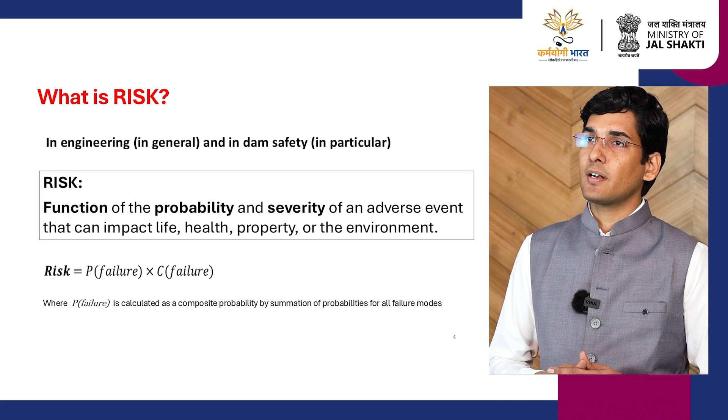Now, what is risk? When we talk about risk in dams, we are looking at two things together: the probability of an event happening and the severity of its consequence. In simple terms, risk is about how likely something is to go wrong and how bad it could be for life, health, property, or the environment. In mathematical terms, risk is represented by multiplication of probability of failure and the consequence of failure.

Now, calculating the probability of failure: the exact probability of failure isn't easy to calculate. It's complex, costly, and takes a lot of time, expertise and data. That's why the tool uses fragility factors instead. These act as a practical substitute for probabilities, making the process faster and scalable for thousands of dams.

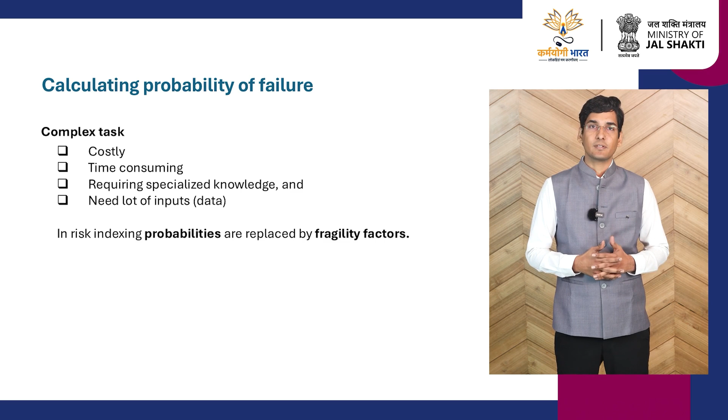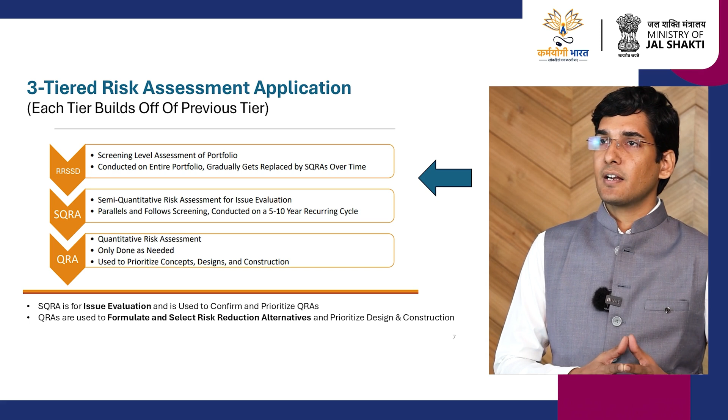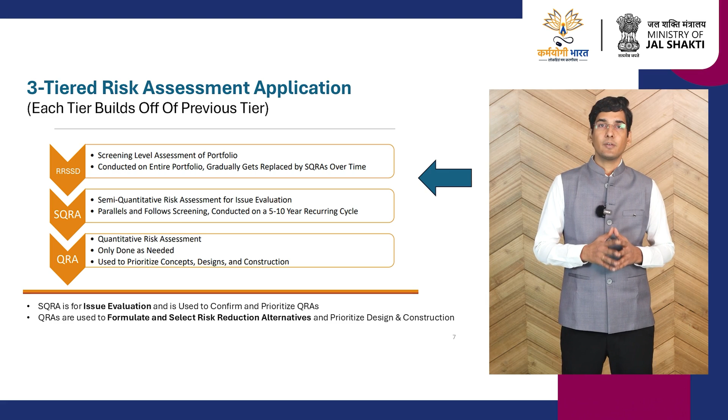Now moving to the 3-tier framework, the assessment system works in 3 stages. Tier 1 is rapid screening, which is a fast process. Tier 2 is semi-quantitative risk analysis. Tier 3 is detailed quantitative risk assessment. In the initial 2 stages, we prioritize dams that require deeper consideration at the next level.

Why screening first? So, why start with screening? The answer is simple. Resources are limited. Financial, human, and technical resources can't cover detailed studies for more than 6,000 dams all at once. Screening allows us to prioritize so that the dams needing urgent attention are identified and addressed first.

And as per the Dam Safety Act 2021, this whole 3-tier process, rapid risk screening (RRSSD), semi-quantitative risk analysis (SQRA), and quantitative risk assessment (QRA), should be completed within 5 years of the enactment of the Act.

What is a risk profile? A risk profile is basically an overview that shows where risks are higher and where our focus should go first. It's the basis for prioritization, helping us decide which dam requires immediate attention and which requires follow-up later.

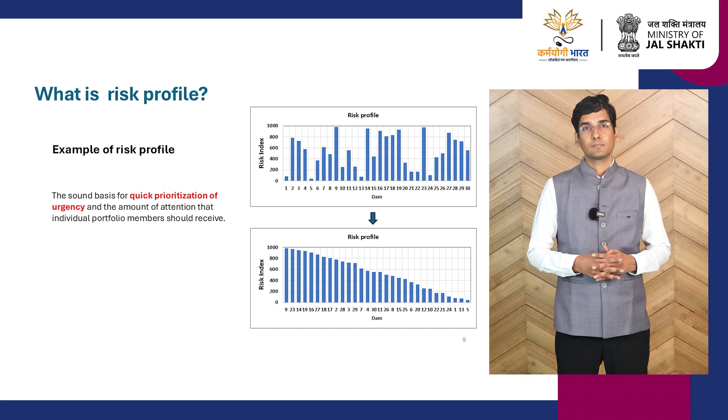Now, risk screening features. It's important to note that risk screening is not the same as a full risk assessment. It's intentionally qualitative. Instead of precise numbers, it relies on proxies. The fragility index represents the likelihood of failure and the potential impact represents the possible consequences. These scores are refined with expert input and validation, so the results are reliable for decision making.

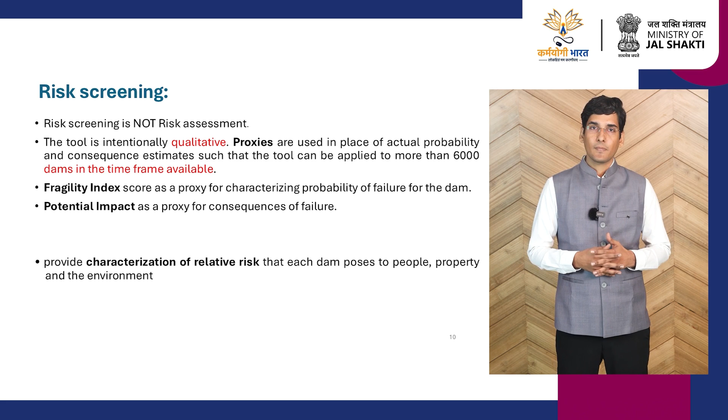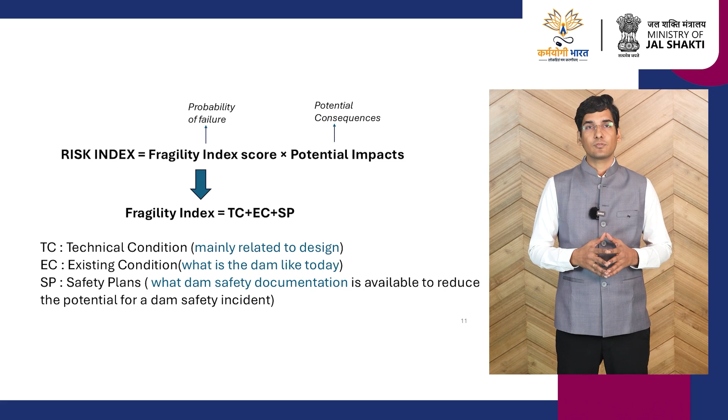Now moving to the risk index formula. The risk index is calculated as fragility index multiplied by potential impact. The fragility index comes from 3 things: technical condition, existing conditions, and safety plan. And potential impact reflects the consequences, that is population at risk, environmental effects, and socio-economic impacts. Together, these give us the risk index that helps us prioritize dams across the portfolio.

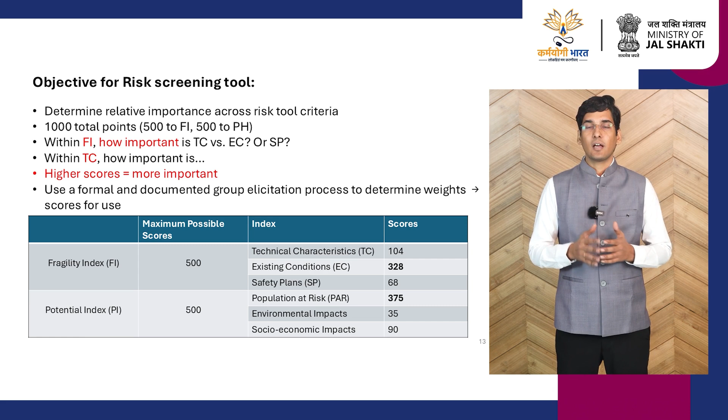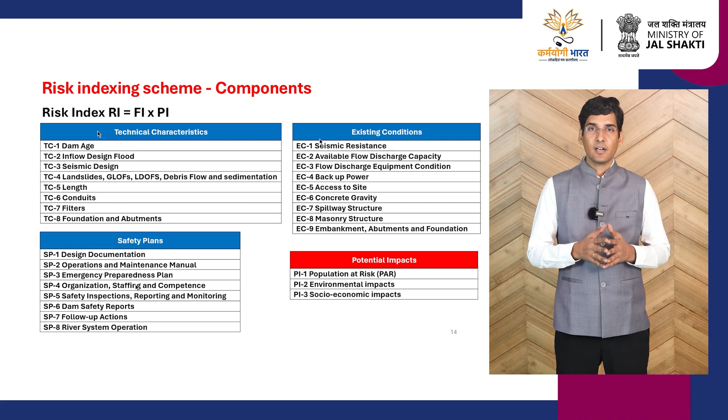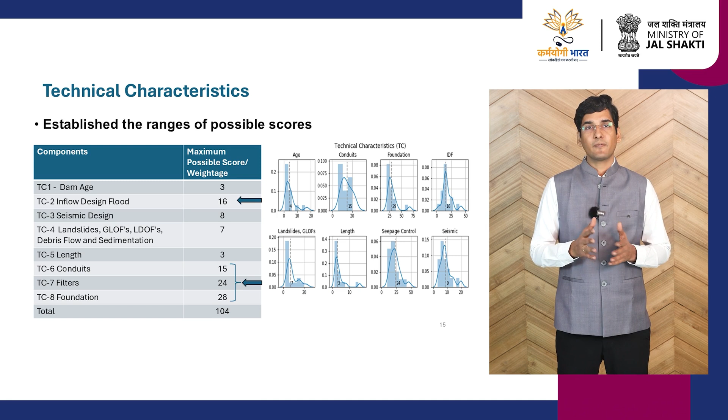Risk indexing scheme. This shows the subcomponents of technical characteristics, existing conditions, safety plans and potential impact. Now I will explain the examples and the weightage of technical characteristics and other parameters used here. Within each factor, weightages are assigned to show their relative importance. For example, certain technical characteristics or safety plans may carry more weight than others. These weights are determined through formal consultation with national and international experts, so the scoring system reflects expert judgment and practical realities.

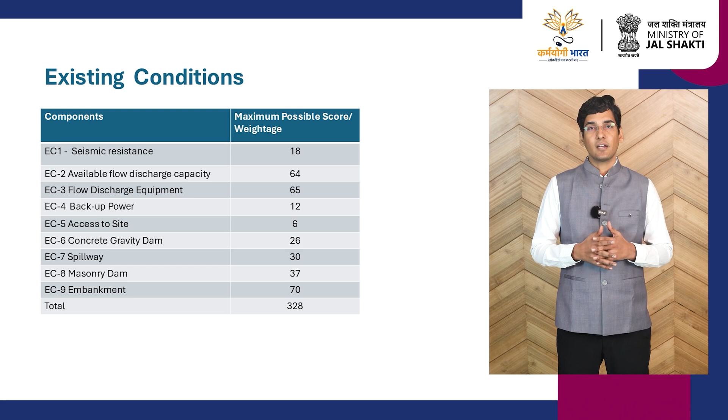Under technical characteristics, existing conditions and safety plans, the scores are further broken down into different sections, each with its own weight. The total score of technical characteristics is 104, existing condition is 328 and safety plan 68. Overall, fragility has a total weight of 500 and potential impact also 500. With individual components weighted by the expert panel, the final risk index for a dam is then calculated, which could be something like 2,50,000, giving a clear and measurable way to prioritize dams.

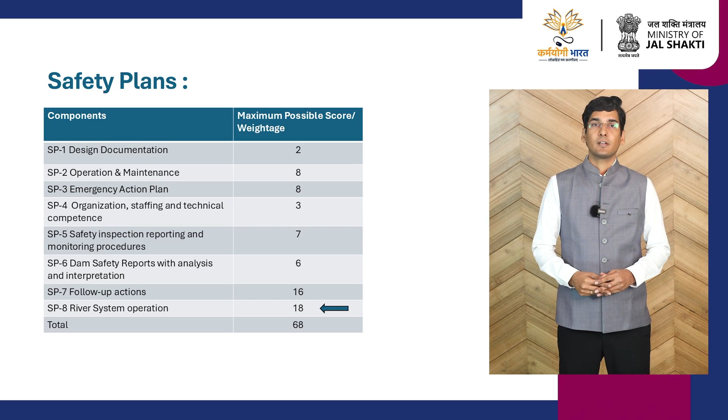Thank you. I hope this session has helped you clearly understand the methodology and the approach behind conducting the Tier 1 rapid risk screening tool. Thank you.